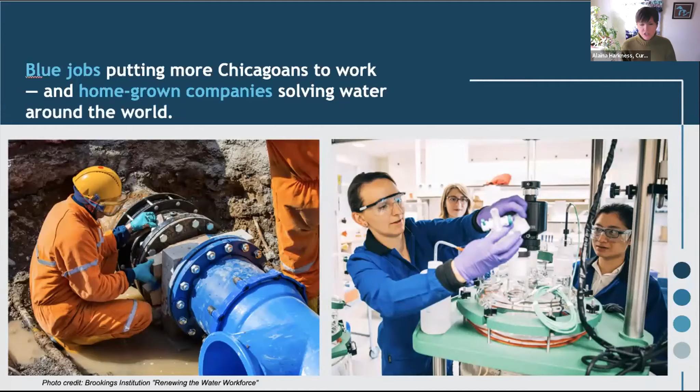Our problem statement is that this innovation could happen faster if we had collaboration. So we really strive to build the kinds of interdisciplinary and cross-sector partnerships that help advance water technology faster, bring it to market, bring it to scale, and help de-risk novel solutions to help make sure we get them into market at the scale that we need to address these issues.

Current does this by striving to be an unbiased advocate for water policies and solutions. It's not always technology, but often involves technology. So we try to stay on top of the field, understanding what's new, what's different, and how it applies to different markets and in different conditions. We do independent assessment and validation of technologies, and we often recommend solutions for others to try or for us to pilot with partners. But we're more than a connector, and we often test new technologies and ideas in the real world.

And we're constantly building a pipeline of new technologies to help meet emerging challenges, like sewage surveillance. We're part of a multidisciplinary and multi-institutional team using wastewater as an early warning and detector for SARS-CoV-2 and other public health indicators. Nutrient management, we are looking at how to mitigate the contamination from excess nitrogen and phosphorus in Illinois waterways, thinking about how to capture and utilize wastewater energy as a renewable source, and figuring out how to target and destroy PFAS and other forever chemicals, a persistent threat to our water quality here in the region.

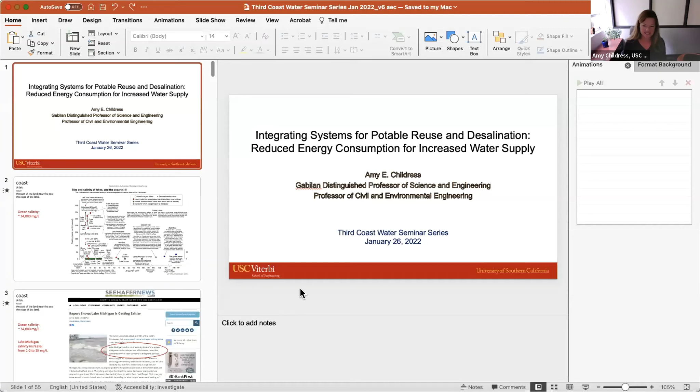That was very nice. I'm going to jump in because I do have at least 40 minutes of presentation, so I'll get started. It's a pleasure to be here for the Third Coast Water Seminar Series.

I thought I would start my presentation with a fact check because I've heard reference to the Third Coast before, but I'd never really thought about it. So I looked up coast to see if it is the part of the land near the sea or the ocean as I was thinking, but they also had a definition, the edge of the land, which I guess could apply here. I also found a chart of size and salinity of lakes and oceans. I found it interesting because it shows the global ocean and Lake Michigan kind of close together. And I thought, wow, who knew? But that's in large part due to the very saline lakes they consider, which stretches out the scale, and also due to a huge break in the scale on area.

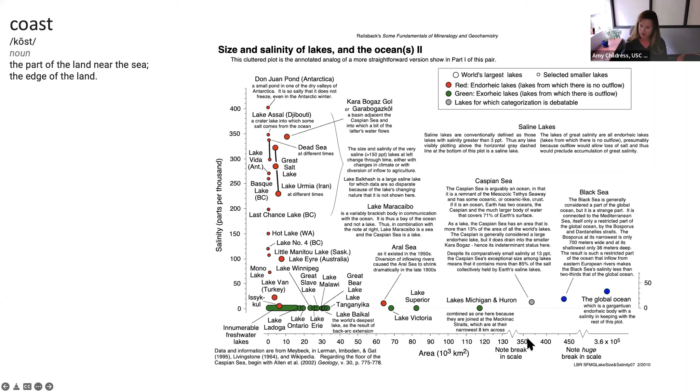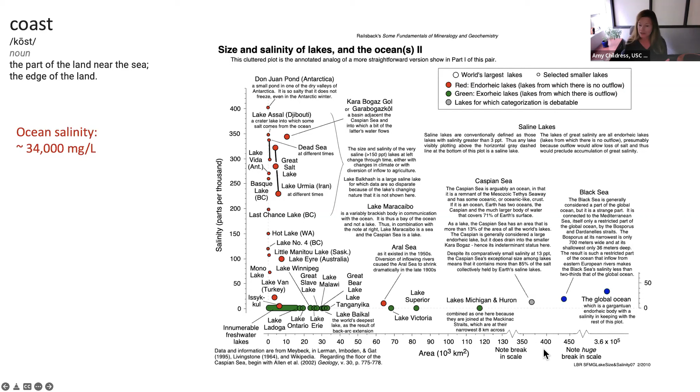But going forward with our work today, we consider the ocean salinity a global value of about 34,000 milligrams per liter. I looked up the Lake Michigan salinity and found that it's about 15 milligrams per liter. This was a very recent article from January 8th that shows the salinity in Michigan has increased from 1 to 2 up to 15 milligrams per liter. Let me grab a pointer really fast. I'll just go with red. Are you seeing my pointer? Anybody? Okay, I'll assume you are. So a big difference between these two salinities, but of course, this increase in salinity is a concern for Lake Michigan because it puts wildlife at risk or just might change the ecosystem. After a little more Googling though, I found that perhaps the greatest risk right now could be that the slogan unsalted and shark-free might not be so valid. So the takeaway here is that salinity is important in lots of regions across the US and around the world, and values of salinity must be considered relative to the systems we're measuring them in.

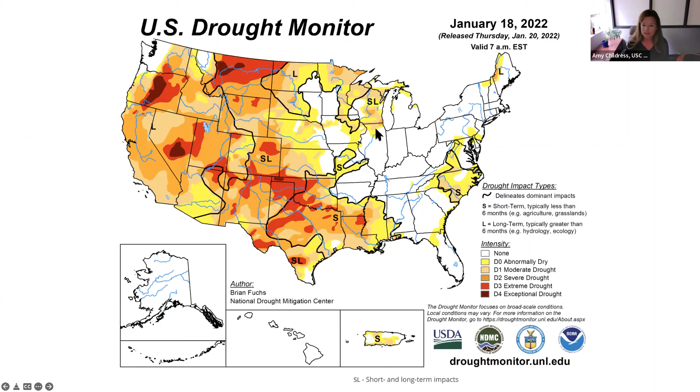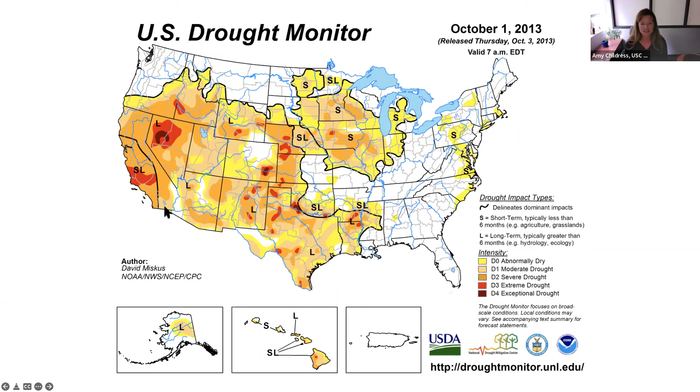And we'll start with some coastal California water supply portfolios. So to address this drought situation and address the changing water supplies, a lot of the water agencies develop water supply portfolios.

This one comes from West Basin Municipal Water District. It's a little bit older portfolio, but it was projected for 2030. You can see a good chunk here, a good portion comes from importing water from the Colorado River or from Northern California. There's another good portion that's local groundwater.

And conservation—conservation is also shown as a water supply. And then there's also a part that's non-potable or recycled water, and a potential desalination, ocean desalination project that's been in the works for about 2 decades that, as of last month, was terminated. So this was kind of a big deal because it was a project that's been in the works for 2 decades.

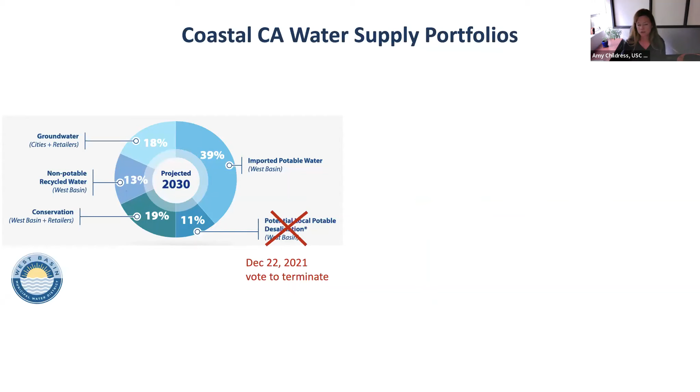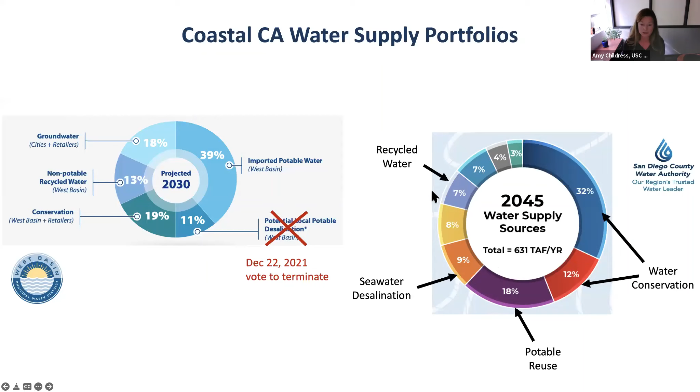If we look at a second water supply portfolio, this is San Diego. You can see a good portion is attributed to conservation, and then another significant portion to potable reuse, a smaller portion to seawater desalination, and then I'll point out also the recycled water.

In the US, there's kind of been this staging of water reuse versus seawater desalination and which one will win. There's a lot of public opinion involved in it, and that public opinion does have political implications because water districts are overseen by boards with elected directors. So public opinion translates to decisions in some cases.

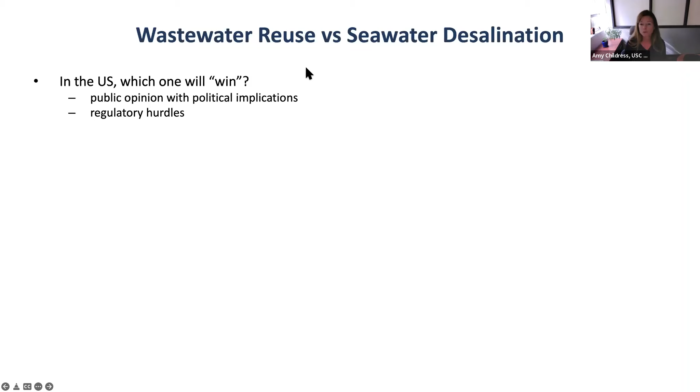There's also regulatory hurdles both for water reuse and for seawater desalination, significant ones. On the California coast, you might expect seawater desalination would have won out. But in fact, if you consider that the highest populations are along the coast, that means there's a lot of wastewater available. So it hasn't won out.

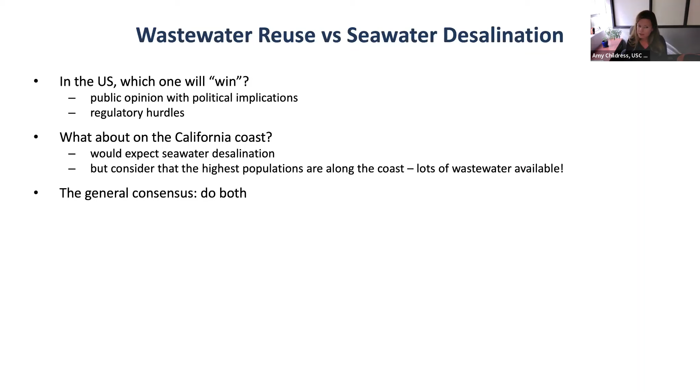The general consensus has been to do both. So we have our surface and groundwater sources that we still would rely on, imported water as well, but we would bring in potable reuse and desalination.

And you see I show desalination here as a smaller piece, and that's because it typically is the most expensive water supply option. So we'd like to use as little of it as possible, but I also show it in the base. That may seem counterintuitive if it's the most expensive option, but for water agencies, it's easier to justify the investment in this facility if it's going to be in constant use and be part of the base load. So I'm going to show it here, but we're going to talk about that again later in the presentation.

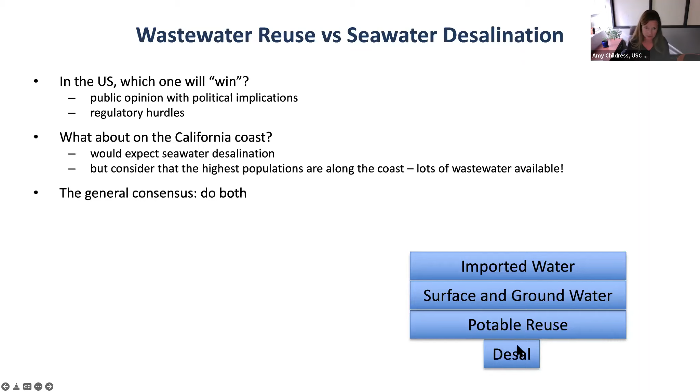So a very quick review of reverse osmosis. In reverse osmosis, you have a feed stream, a pressurized feed stream entering a membrane module. The blue dots are water, we'll call the orange dots salt, because in this case we're trying to remove salt. The permeate, the relatively clean permeate, is what passes through the membrane, and you're left with a concentrate or brine that has to be disposed of.

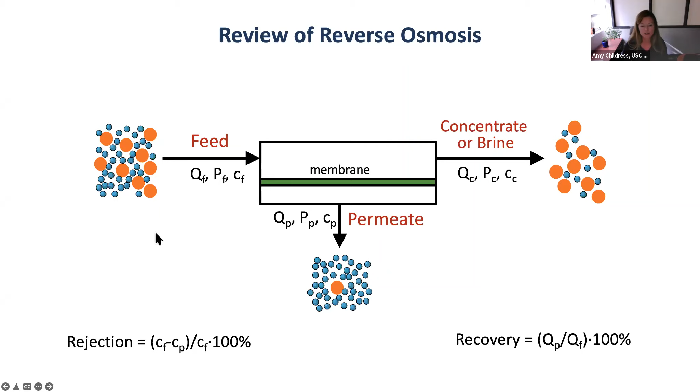The variables here are flow rates, pressure, and concentration. A lot of times we're interested in the rejection of the membrane—what remains in the permeate or what was rejected by the membrane. And we're also interested in the recovery: how much of this original feed did we recover as permeate?

So we'll go to a coastal water system, and I'll talk about how those reverse osmosis membranes are used. If we have a city that has part of its water supply coming from the sea or the ocean—I should say it is the ocean, but seawater desalination is a term that's more recognized, so a lot of times, even though we're talking about the ocean, I will be referring to seawater desalination. So here we have the ocean water coming in to the seawater RO membrane, drinking water coming out, a brine being returned to the ocean.

You could approximate this, and we will be at about 50% recovery. So 50% of the water that comes in is drinking water, 50% is returned as a high salinity brine.

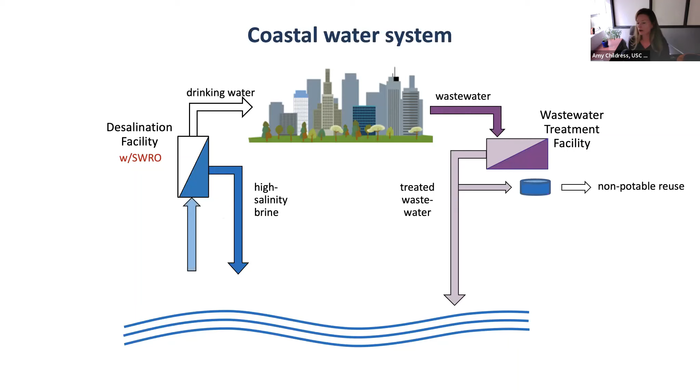On the other side of the city, we have the wastewater coming out, going to a wastewater treatment facility that historically would discharge back to the ocean. But now we do some tertiary treatment and use some portion of that water for non-potable reuse. And it's becoming a little more common to perhaps send another portion of the water to an advanced water purification facility for potable reuse. In California in particular, this is often done with RO membranes.

I'll call these wastewater RO membranes—just maybe a little bit of shorthand to do that. So that's what we're interested in: the potable reuse with these wastewater RO membranes.

So briefly, if I tell you about the seawater desalination challenges, I would start with energy consumption. Seawater is one of the most energy intensive water supplies. Of course, if you're comparing to pumping water from Northern California over the Tehachapi mountain range, maybe the energies are coming close. So energy consumption is a major concern.

Also, on the intake system, impingement and entrainment of marine organisms on the intake screens or in the intake system is an issue, and it's led California to suggest using subsurface intakes when feasible. The question becomes, if the subsurface intakes double the construction costs and the construction time, is that still feasible? That's up in the air. Lots of good questions around that.

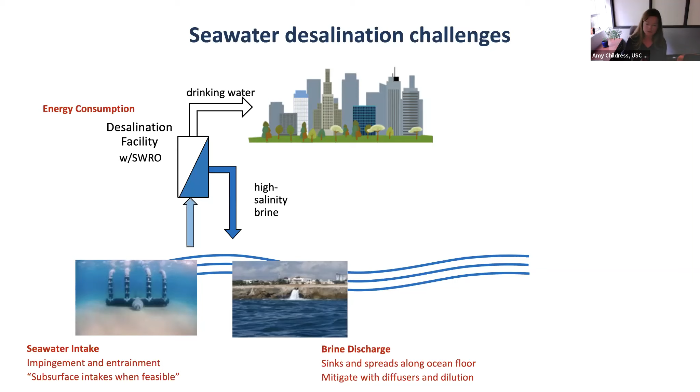So in the past, we've co-located desalination facilities next to power plants. And a lot of people think that we've done that because desalination facilities need a lot of electricity and power plants can supply it. And it is true that on-site electricity rates can be cheaper than transmission rates. But the real reason for this co-location is probably more related to the intake and outfall infrastructure and the water within that infrastructure. And the permitting of that infrastructure is perhaps most important. And so the desalination facilities can share that water, and that has made the co-location nice.

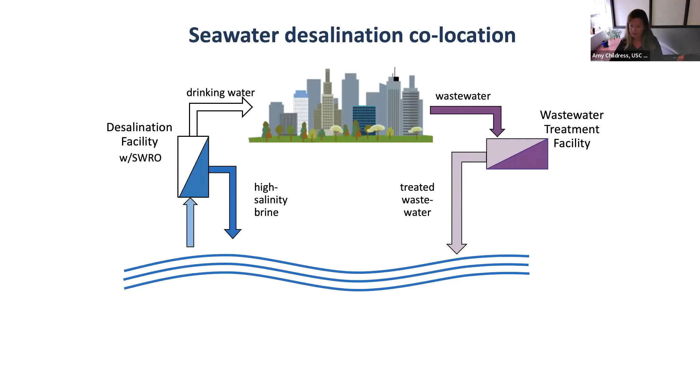But as many of you probably know, these once-through cooling systems are being phased out. And so now there's interest in co-locating near the wastewater treatment facilities. And the reason is, if we blend the treated wastewater that we're already discharging to the ocean with the high salinity brine, we can dilute that brine to meet regulations and have a viable desalination facility. So this is a co-discharge scenario, and it currently does happen in some locations.

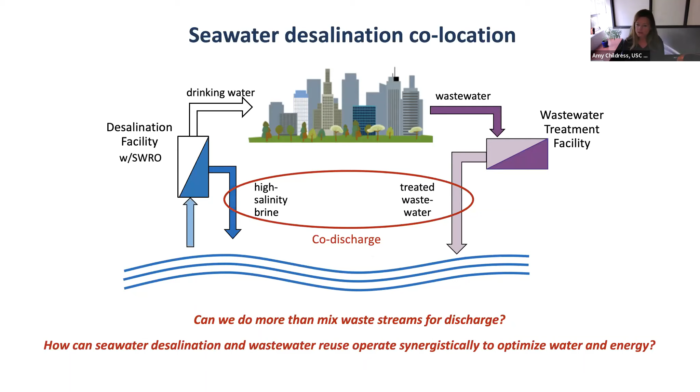And this is where our work kind of took off from here, which is, can we do more than mix these waste streams for discharge? Because if you think about it, the water resource that's in this treated wastewater is being lost to the ocean. And we asked the question, how can seawater desalination and wastewater reuse operate synergistically to optimize both water and energy?

So we developed a framework, and the framework, I'll show it to you in a minute. It's a simple framework. Its value is in putting together the pieces of these systems, we could analyze them and think about the feasibility of these ideas that we're considering.

So we developed a framework, and in the first part, we took a seawater—it wasn't that we took it, we just came into the project with a seawater desalination perspective. What's the best blending scenario to meet a discharge regulation of 40 grams per liter? And discharge regulations aren't always that simple. 40 grams per liter, really it's different concentrations at different distances from the discharge point, but we just simplified to 40 grams per liter for this study.

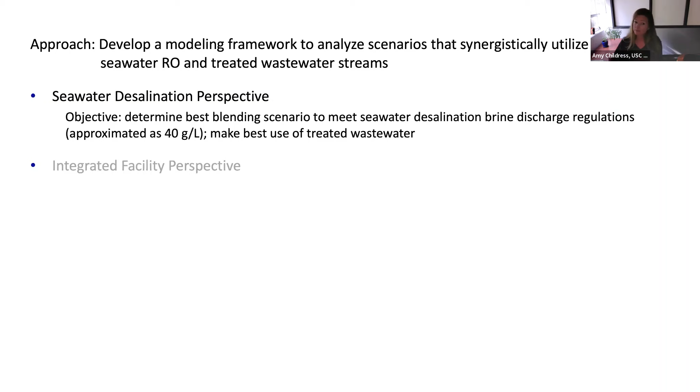We also wanted to make the best use of the treated wastewater still. So these are the two scenarios we considered. We considered more scenarios, but these are the two I'm going to show you. We considered this co-discharge scenario or brine blending—this is what's currently being done in some locations—against a potable reuse scenario, so feed blending, or a proposed future scenario.

So I guess what I want to emphasize here, this is not being done. This is something we're saying could be done in the future, and of course would be subject to potable reuse regulations. So what we're doing here is bringing the treated wastewater in on the feed side. We would treat the wastewater with advanced processes and then blend it with the intake seawater. The advantage being the RO membrane would see less osmotic pressure, so we have less pumping, less energy costs, and at the same time, our discharge would be at a lower concentration. So we thought there could be some interest here.

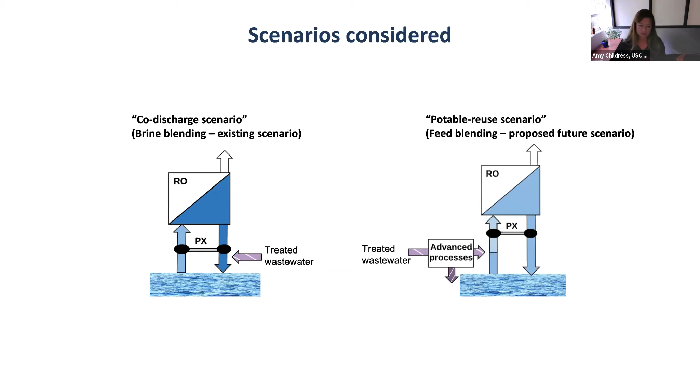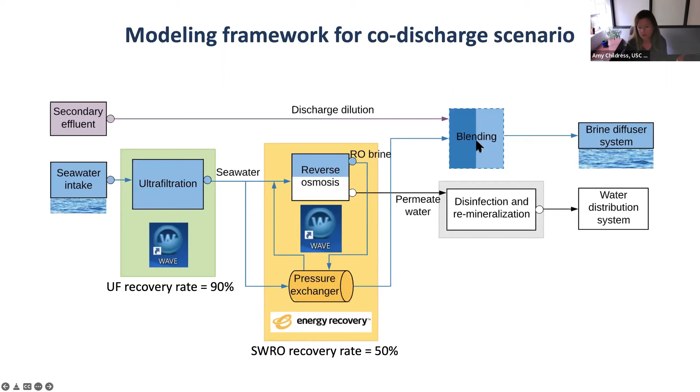This is the framework we used. This is the secondary effluent coming in and being blended. The seawater intake going through ultrafiltration. We modeled using WAVE design software and power model for the energy recovery. We used pressure exchangers for all scenarios, and we used WAVE also for the seawater RO. So for the UF, we assumed a recovery of 90%. For the seawater RO, a recovery of 50%. And we're blending the waste streams from these processes. The permeate stream goes on to the water distribution system.

This is the framework for the potable reuse scenario. What you see is the blending happens upstream of the reverse osmosis. We also implemented UV AOP after the RO for those low molecular weight organics and other things that can pass through an RO membrane and that we find in wastewaters.

We used a wastewater RO recovery rate of 80% for the treated wastewater. And we took an overall approach when we blended the streams, so the seawater where we used a 50% recovery rate and the wastewater 80%, we just took a weighted average of the two.

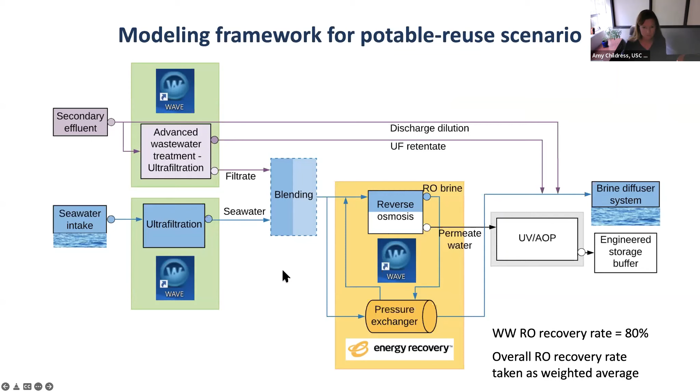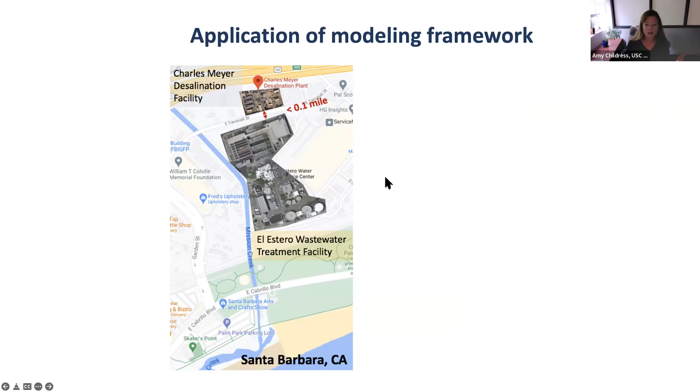We applied the framework to the Charles Meyer desalination facility in Santa Barbara, California. So this is a medium-sized desalination facility. I'm going to go with 3 MGD, it helps keep the numbers easier.

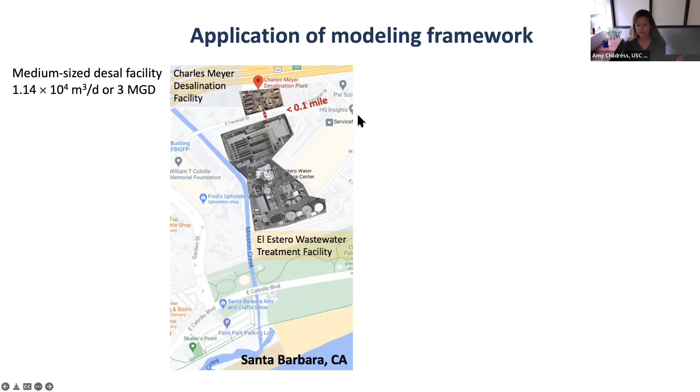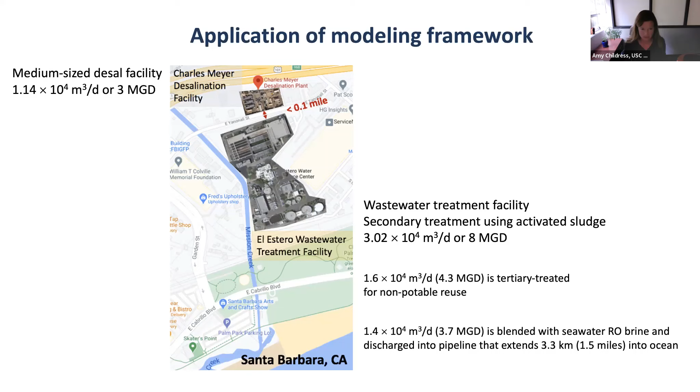So it's a 3 MGD facility located less than 0.1 mile from the El Estero wastewater treatment facility, which treats with secondary treatment using activated sludge, and it's an 8 MGD facility. So half of that 8 MGD is tertiary treated, filtered, and it goes on to non-potable reuse, golf course watering or green space watering. The other almost 50% is blended with the seawater RO concentrate and discharged 1.5 miles into the ocean. So this is that co-discharge option that I mentioned.

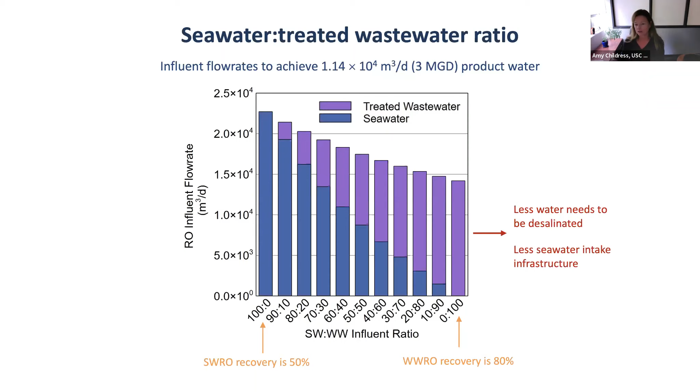And this is kind of obvious, right? Wastewater recovery or wastewater reclamation is typically thought of as being cheaper and better than seawater RO. So nothing so great here, but again, we put it into this framework of thinking.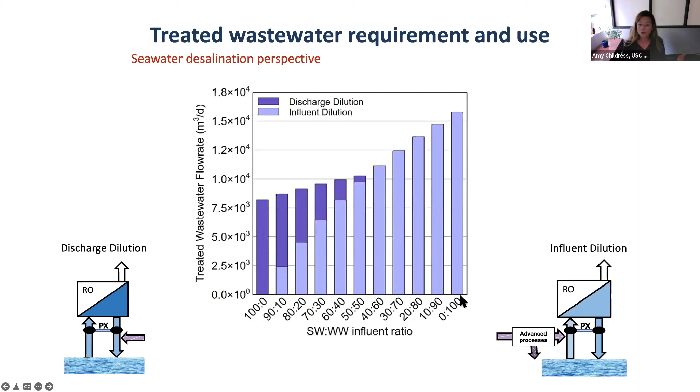Next, we looked at the treated wastewater that's required and how it's used. So the treated wastewater flow rate is either used for discharge dilution, or for influent dilution. The discharge dilution represents this 100% seawater case, and the bars that are only light purple are this influent dilution case. Then we have some bars in the middle that have both discharge dilution and influent dilution, so I'll bring in an arrow to represent that as well.

Now, if we're trying to make the greatest use of the water resource, we would prefer to only have influent dilution and no discharge dilution, right? That would tell us that operating with 40% seawater, 60% wastewater, we could make seawater RO viable and also make the greatest use of that water resource. We ask, do we have enough treated wastewater to do that? And in fact, we do.

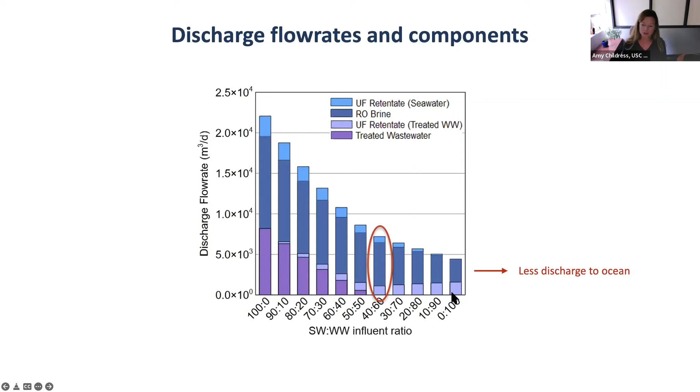So again, from the seawater desalination perspective, we looked at discharge flow rates and components, what's being discharged. Again, if we go to this 40-60 split, that's where we drop off this dark purple, or treated wastewater that we would be wasting to the ocean. We can see that the rest of the components are UF retentate from the treated wastewater, RO brine, and UF retentate from treating the seawater. A key takeaway from the graph is, again, as we have more wastewater in the mix, there's less discharge to the ocean.

Another thing we looked at was the reduction of boron concentration from blending. Boron is present in seawater at 4 to 6 milligrams per liter. We often use 2-pass RO, so we take the permeate from a first pass RO and raise the pH.

Then we send it through a second pass RO to bring boron to regulatory levels. Here we're looking at the boron concentration in the first pass RO permeate as a function of our ratio. If we bring in the California state notification level for boron, what we see is if we operate at a 60-40 ratio, we can be under that level only with the blending. We don't need the second pass RO.

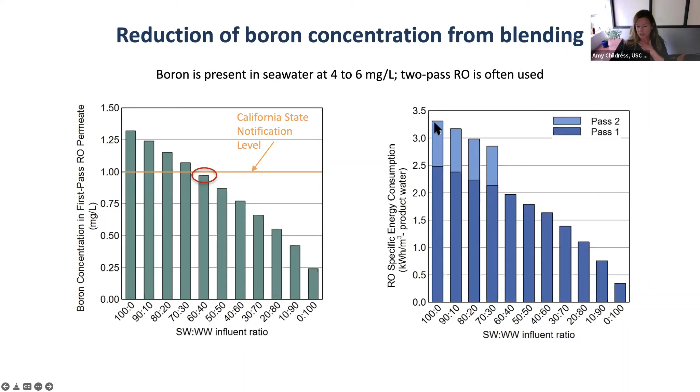And if we looked at the RO-specific energy consumption, which we were all along, but I'm just showing you the data now - here we're looking at energy from the first pass RO and energy from the second pass RO. By no longer needing the second pass RO, you can see a significant energy savings by avoiding it.

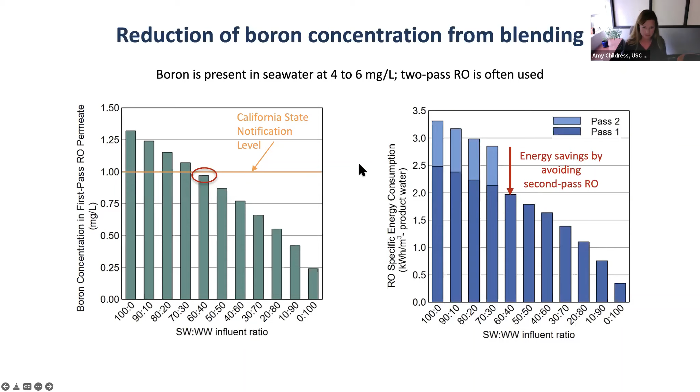Some chemical benefits, or benefits to the chemical species. This is a summary for these two conditions I've been talking about, the brine blending scenario and the 40-60 blend, with flow rates on one side and specific energy consumption on the other. So the key advantages - if we look at how much seawater and infrastructure is needed in our current scenario versus what we're proposing, that's a significant decrease.

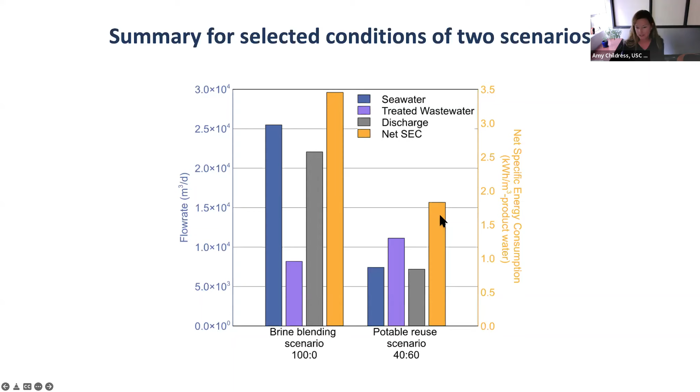If we look at the purple bar, that's treated wastewater - not much change there. If we look at the gray bar in terms of what's discharged to the ocean, we see a significant decrease with our potable reuse scenario. And if we look at net SEC, we also see a significant decrease with this potable reuse scenario.

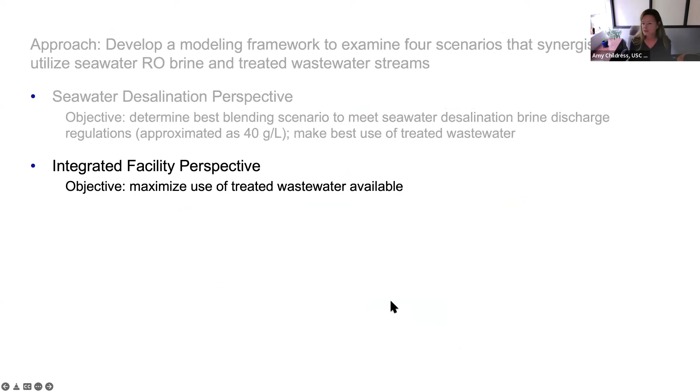But we stepped back and realized that how we started this work, focusing on seawater desalination, was no longer where we were at. We were realizing we need to be looking at both systems and thinking what's the best thing to do here. And the best thing is to maximize the use of treated wastewater that's available.

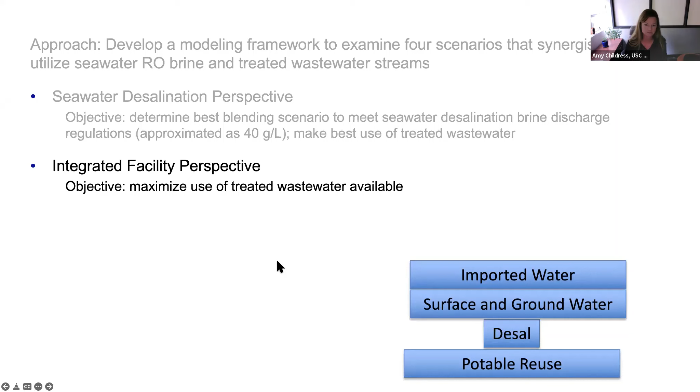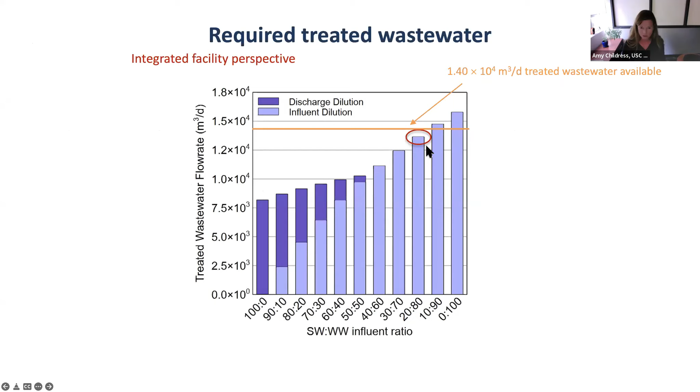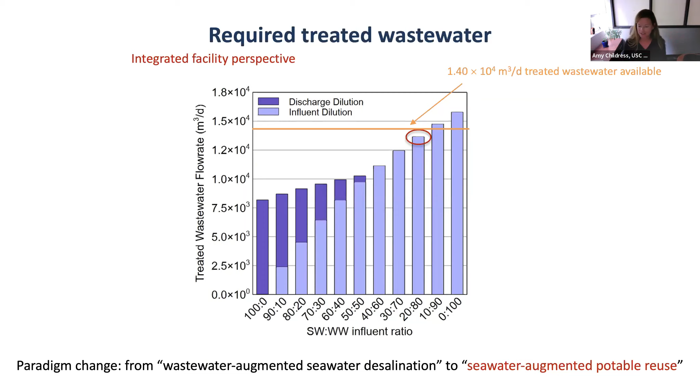Really this was where the project had a paradigm shift. We realized we were approaching this from a wastewater augmented seawater desalination perspective, when it should be a seawater augmented potable reuse perspective. We are continuing along this seawater augmented potable reuse path because we think it's interesting. Again, it's a thought experiment - nothing that's being done. But I'll tell you in the next slide why we think it's interesting.

When I went over the seawater desalination challenges, I might have skipped one of the most important ones, which is demand risk. That's if less expensive water supply options become available, the demand for water from seawater desalination decreases. This could have played a key role in West Basin deciding not to go forward with a seawater desalination facility, because demand risk has caused the original Santa Barbara facility, the Yuma desalination facility - that's agricultural desalination...

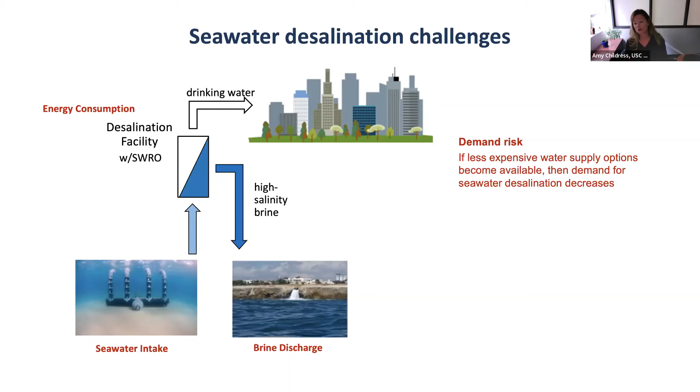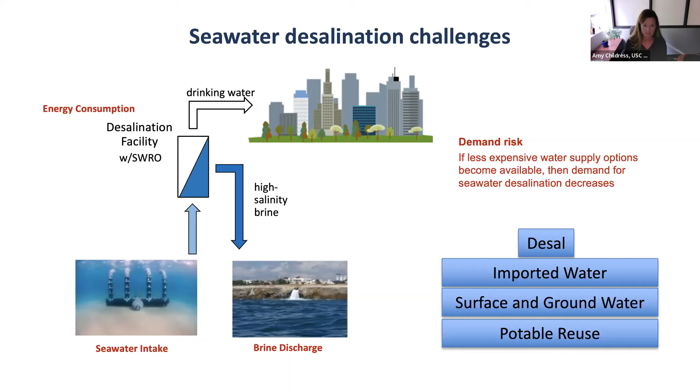So I hope I demonstrated the multiple benefits of the potable reuse scenario - potable reuse scenarios, sorry. I blame all mistakes on COVID.

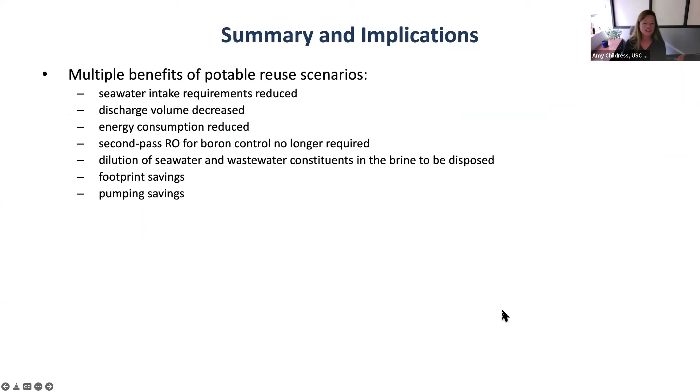Okay, so multiple scenarios, multiple benefits, including energy, cost, and footprint savings. Our goal was to make the highest use of the water resource embedded in the treated wastewater. We are moving forward with how can we protect seawater desalination from demand risk.

And the second project I'm going to show you today ties into this last question: is there enough wastewater available to meet potable reuse demand? Are other sources available? So, study number 2.

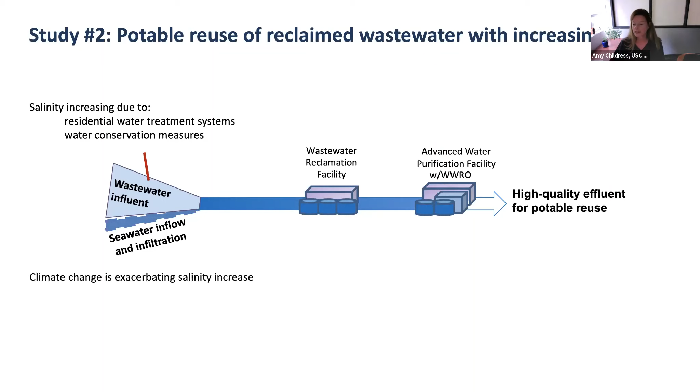So, and all of this, because salinity is conservative, it passes through the wastewater reclamation facility and is only treated once it gets to this wastewater RO in the advanced water purification facility. So maybe you have to operate that RO at higher pressures.

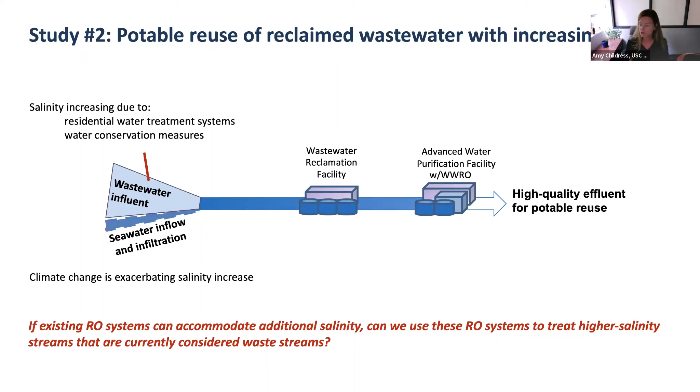But we said if existing RO systems can already accommodate this additional salinity, can we use these RO systems to treat higher salinity streams that we currently consider waste streams?

So one example of this involves what's called a regional brine interceptor collector. Inland from the coast, we have brackish water RO systems and waste agencies that like to discharge either the brines from their desalters or their concentrated waste streams into this interceptor or collector. And right now what happens is it comes into the wastewater treatment facility separate and is discharged to the ocean. It does not go to the advanced water purification facility. An example of this is Orange County Water District's groundwater replenishment system that is currently undergoing expansion from 100 to 130 MGD. And they have a regional interceptor collector that's discharged to the ocean.

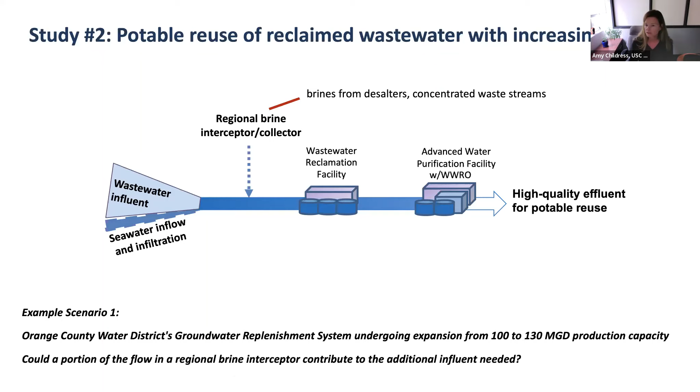Could a portion of the flow in that regional brine interceptor contribute to the additional influent needed? And that was our question.

The second scenario is we also have out there in inland regions, brackish water reverse osmosis brines. And these brines can go up to salinities of 10 grams per liter, which is considered high in the brackish water world. Of course, compared to seawater, it's 34 grams per liter, so it's not so high, and relatively low TOCs because they've already been pre-treated.

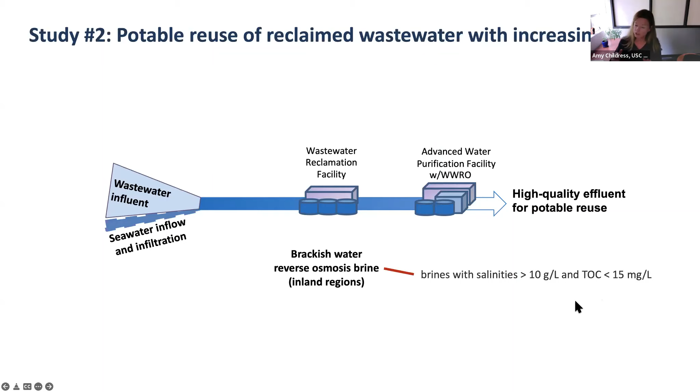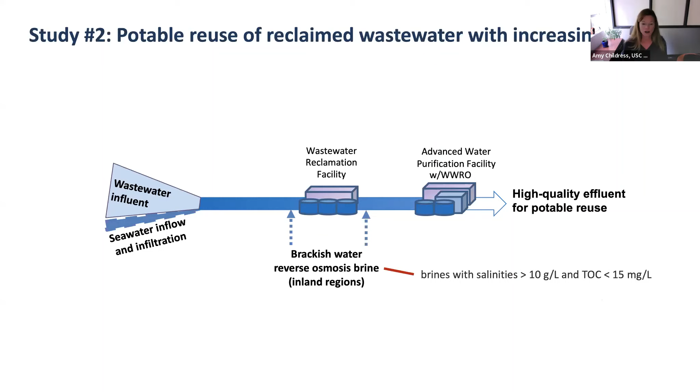So we asked, can these brines be brought in either upstream of the wastewater reclamation facility or downstream of it? And right now, this is being done. This is not brand new. This is being done in some locations, but a lot of other locations are discharging their brine to disposal wells or evaporation ponds and not making use of that water resource.

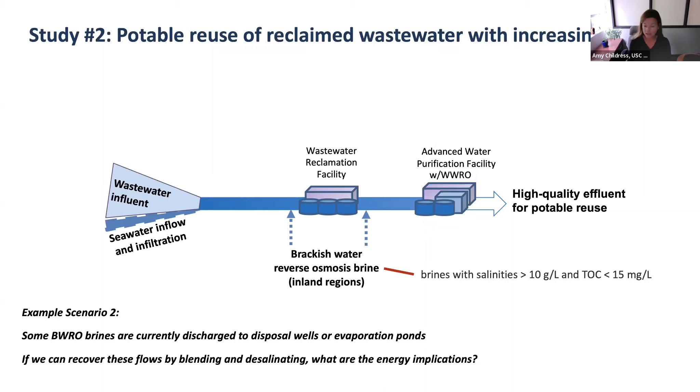So we asked if we can recover these flows by blending. We're going to bring down that salinity by blending with the wastewater and desalinating. What are the energy implications?

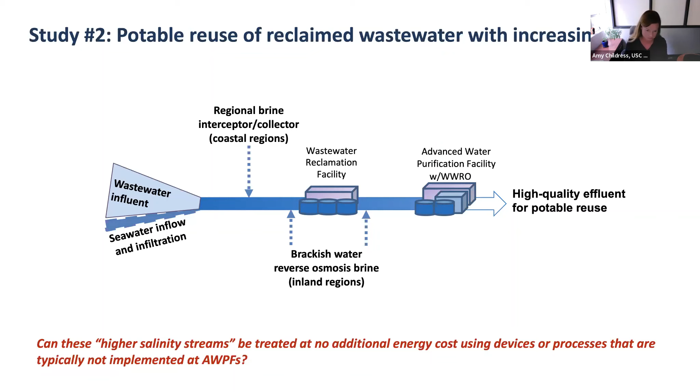And then with both of these together, I have to throw out the big question that we kind of started with. Can these high salinity streams, we call them high salinity, they're only higher than the existing wastewater. They're not higher than seawater, you know. Can these streams be treated at no additional energy cost using devices or processes that are typically not implemented at advanced water purification facilities? All right, these were our objectives.

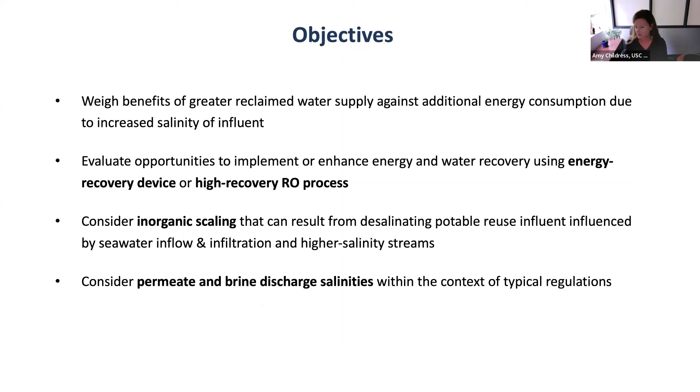We're weighing the water supply, the additional water supply against the energy consumption. We're looking at using energy recovery devices or high recovery RO. We considered inorganic scaling that could occur. And we also considered permeate and brine discharge salinities within the context of typical regulations.

The systems we considered, first a two-stage RO system, and in this system, the brine or concentrate from this first stage is sent to the second stage. And this reduces the energy consumption by decreasing the irreversible work or the energy that's lost in the desalination process. So we're already considering energy just with the two-stage RO.

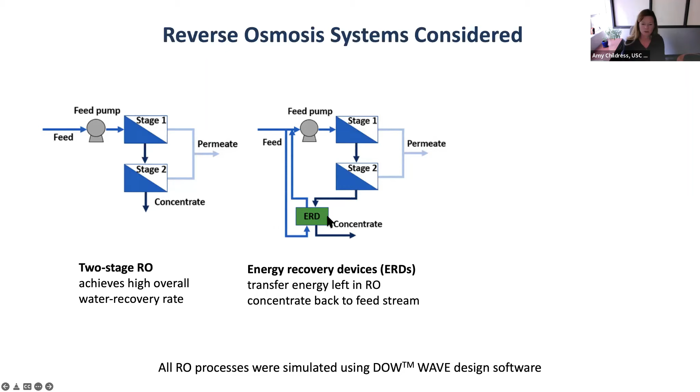We looked at a second scenario, bringing in an energy recovery device. Now, you have to take seawater desalination out of your mind here, because at seawater desalination facilities, energy recovery devices are standard, but they are not standard at brackish water RO or wastewater RO potable reuse facilities. So we said, can we bring this in? And what they do is transfer the energy that's left in the RO concentrate back to the feed stream. So you need less feed pressures.

And the third thing we considered was high recovery RO. We specifically considered the CCRO process because a Dow wave model already existed for that. But we could generalize this to high recovery RO. This is a semi-batch process where the feed comes in, you're constantly producing permeate, and you're recycling the concentrate stream back. And periodically you're doing a blowdown. That's what I'm calling it. That's not the official term, but you're blowing down that concentrate stream. And also there, the goal is to reduce energy consumption because you can decrease the irreversible work by operating with a time variant feed pressure.

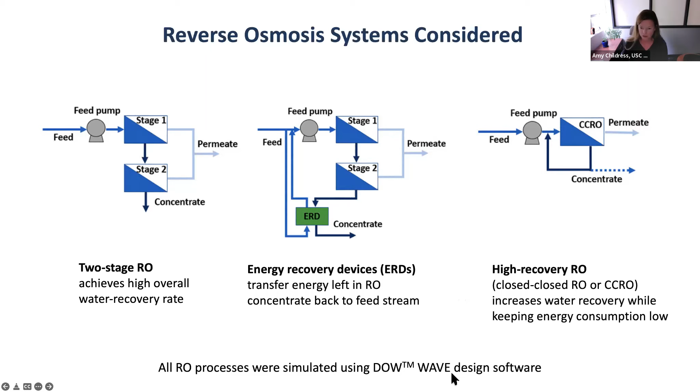So all of these were modeled using Dow wave design software, all of them with the intention of decreasing that energy. This was the framework we used. It was for a facility similar to Orange County Water District, a large advanced water purification facility, treating 134 MGD of secondary treated wastewater. So we have the wastewater coming in, intruded seawater. We brought it in at 0%, 2.5, 5, 7.5, and 10%.

The 2.5 is probably most realistic, but we also didn't consider just the concentration of the wastewater increasing from reasons other than intruded seawater. So we figured this just kind of represents increasing salinity due to a variety of things.

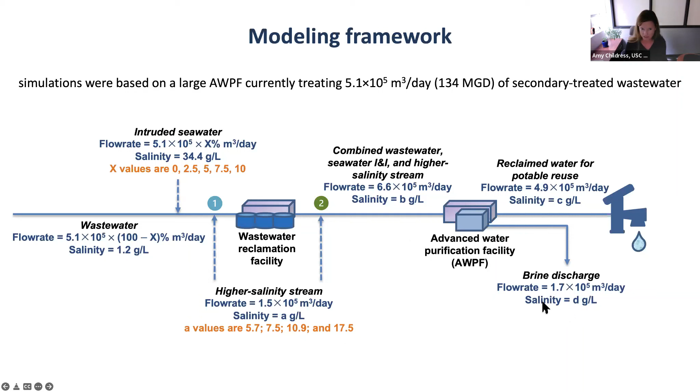We considered several higher salinity streams, ones that are representative of brackish water RO concentrate: 5.7, 7.5, 10.9, and 17.5 grams per liter. We had the combined stream going into our advanced water purification facility, and we kept an eye on the salinity of the product water leaving that facility and of the brine that has to be discharged from the facility. And this was the first set of results.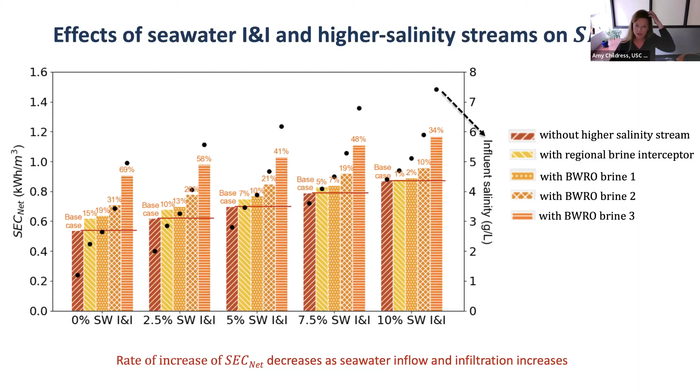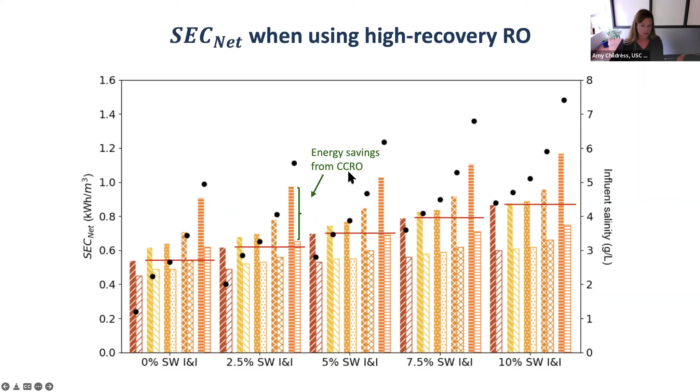We thought that was valuable. This is the SEC net when using the high recovery RO. So you're looking - the left-hand bars are all the same, it's just the right-hand bars that have changed. Now you can see the energy savings when implementing a high recovery RO process like CCRO. And we can look at the cases where we only get partial compensation, but we can look at all the cases where the second bar is beneath that red line, which indicates that additional salinity is fully compensated for.

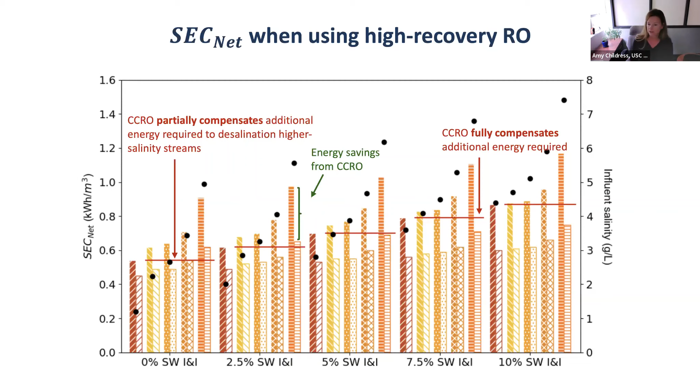This graph shows a comparison of those two. And what you can see just by comparing - this is RO alone, the green is RO ERD, and the squares are CCRO - we see that there's more benefit to the CCRO process. Of course, you may have higher CapEx and OpEx and concern for control of the variable pressure that are necessary, which are significant concerns, but there are also energetic benefits.

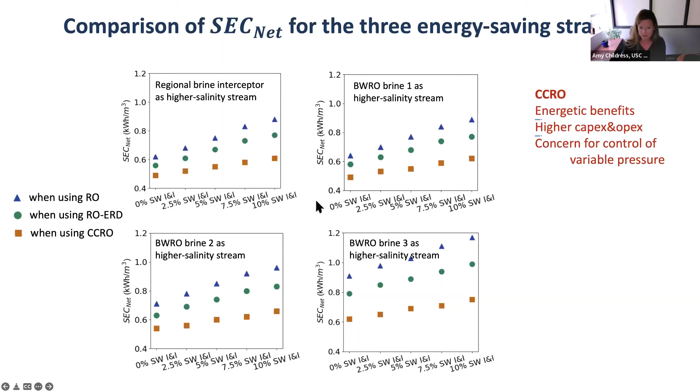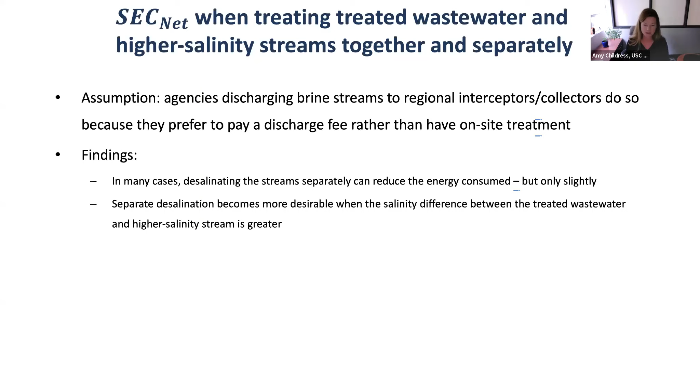For those thermodynamicists out there who are asking the question, what about just treating the higher salinity streams separately to avoid the entropy increase? That's a great question. We considered it. We looked at treating the higher salinity streams separately. I'm not showing the graph because the differences are very minor. But we went into this with the assumption that agencies that are choosing to discharge to interceptors are doing that because they'd rather pay a fee than carry out on-site treatment. But when we did look, we saw that desalinating the stream separately can reduce the energy consumed, but only slightly. And that separate desalination is more desirable when the salinity difference is greater, as you would expect if you're considering the entropy.

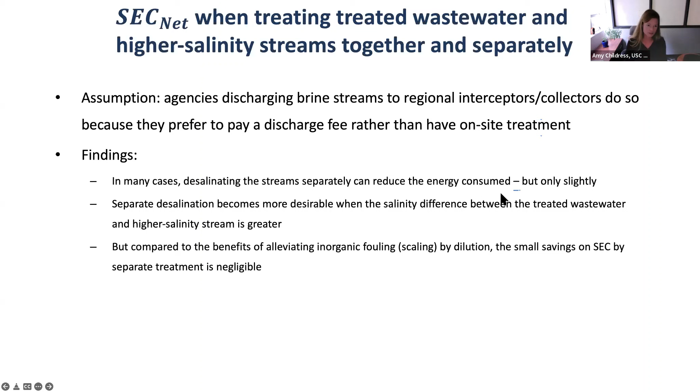We also looked at the scaling, and by blending those higher scaling streams, or those streams with higher likelihood of scaling, with the treated wastewater, we were able to dilute a lot of that scaling material, a lot of the salts. That was a significant savings, so we still think blended treatment may be the better way to go.

Also very important, we did not consider the capital costs and complexities associated with separate treatment, but we think those would play an important role in the agency decision-making.

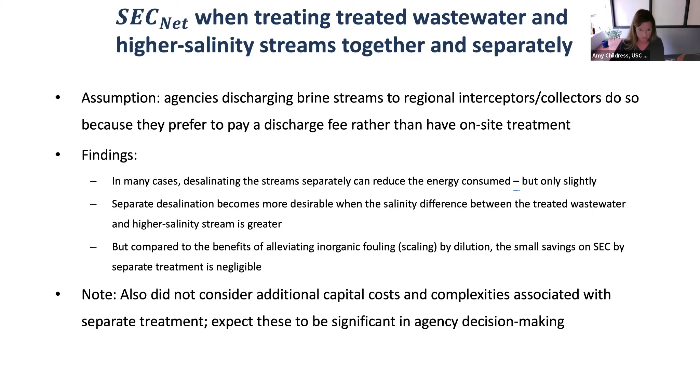The last thing we looked at were the permeate salinities compared to the limits. We took an example limit of 580 milligrams per liter, and we were well within that at a water recovery of 75%. At higher water recovery, we did exceed that permeate salinity limit.

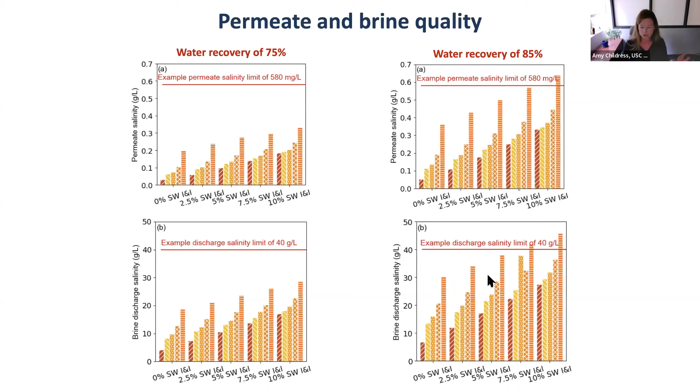Same with discharge salinity limits - at the higher recoveries, with higher salinity streams, we did exceed that. So in those cases, maybe you need less flow rate of those higher salinity streams, or you'd have to operate at lower recoveries in order to meet your permits.

Conclusions: the rate of energy consumption increase caused by the higher salinity streams decreases as background salinity increases. If we keep this in mind with expecting salinity, especially with climate change, to continue increasing, this has implications for the value of utilizing the water resource in these higher salinity streams.

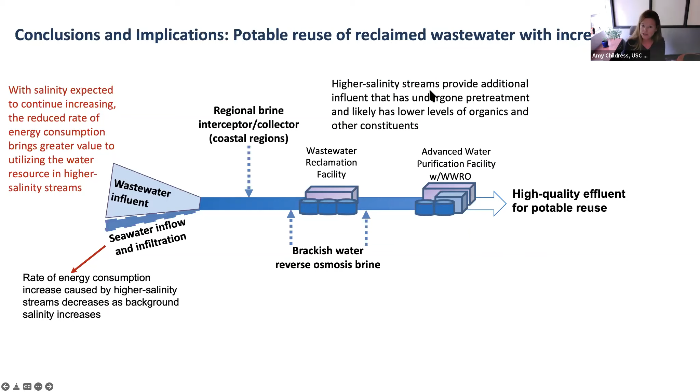We found the higher salinity streams provide additional influent. It's undergone pre-treatment and has lower levels of organics and other constituents. It does have more ions that are likely to form scale.

It's important to have flexibility in where these higher salinity streams are blended, depending on your wastewater, your biological treatment process, and the water quality of the higher salinity streams. We found cases where we can get desalination of additional salinity at no additional energy cost.

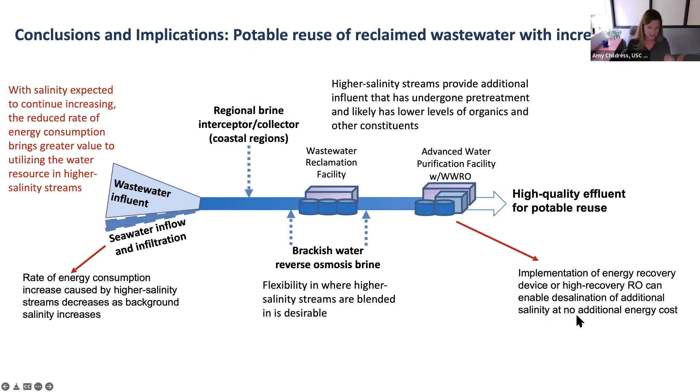That's free desalination. The disclaimer, an important one: addition of higher salinity streams must be considered within the context of enhanced source control, maybe source separation, and also the capital and operating costs.

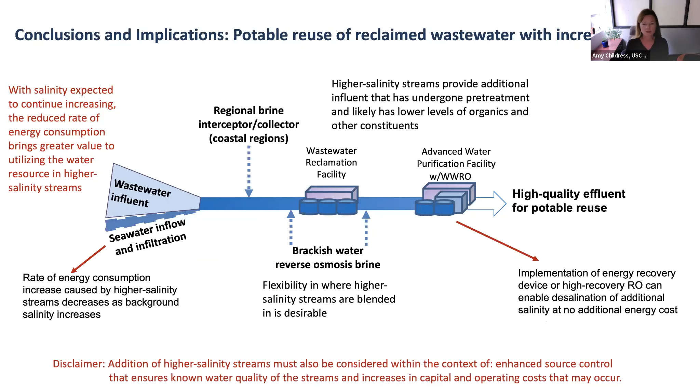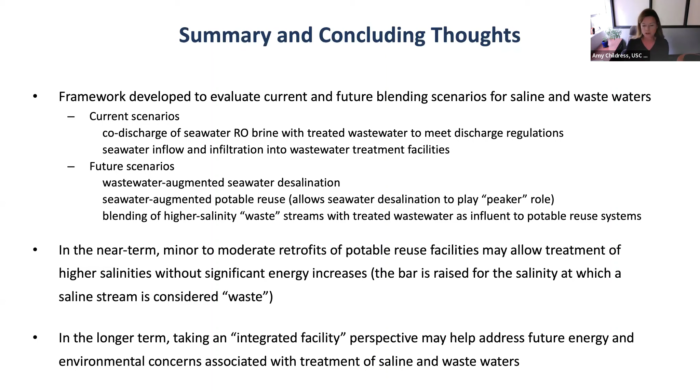So we developed a framework. We looked at some current scenarios, future scenarios. In the near term, we proposed minor to moderate retrofits for these potable reuse facilities, and perhaps treatment of saline streams that are now considered waste streams. In the long term, we're thinking of an integrated facility perspective that helps address energy and environmental concerns.

Thanks so much for a great talk, Amy. I guess actually I was going to start with my wrap-up question.

I'm going to move to the top because 'go easy on the salt' relates to a question someone had about the source of the saltier Lake Michigan. You very kindly started with a Great Lakes focused frame for this desalination question. Can you talk a little bit about the sources of increasing salinity? Because, as I understand, it's not actually due to our wastewater treatment facilities, but something else.

Right. My understanding, from a quick look, is road salting, especially in the winter months. I know there's been some options proposed to decrease that. I haven't looked any more to know if there are other reasons for the increased salinity.